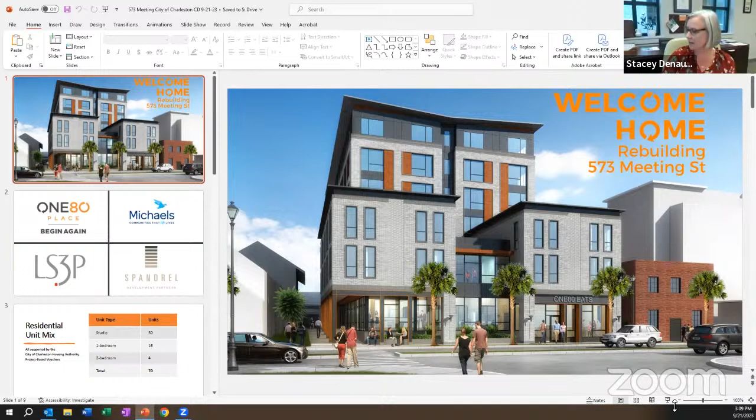Just a quick refresher, the 573 Meeting Street project will be located at the former location of the Crisis Ministry Shelter that many of you remember and have been supportive of over the years. Literally right outside my window here, if I gesture to the back, that's why.

This project has been a long time in the making, and it serves really a very specific purpose around providing affordable housing for individuals moving out of homelessness, so those at extremely low income levels.

The development team that has been working on this project, some of whom you'll hear from today, along with 180 Place as the nonprofit partner, the Michaels Organization, who is a national, widely respected, widely known affordable housing developer and also affordable housing operator. You'll hear from Bruce Morgan. They bring the affordable housing development expertise.

And then after the project is built and leased up, they will be our property management partner for the LIHTC management requirement of the units.

LS3P has been our architect partner from the beginning when we needed to demolish the old facility, and has really been a huge partner for many years now of the organization, as well as many projects in this community that are very well known. And Spandrel Development Partners are our for-profit development partner who bring a level of expertise in the successful development of multifamily housing in many environments.

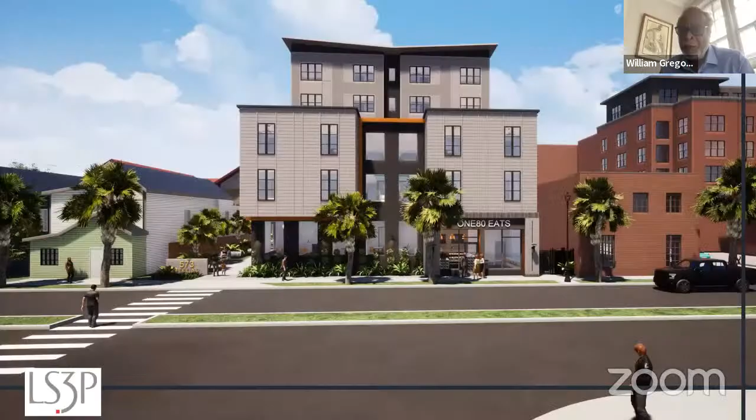And you needed the project-based vouchers to help with the financing, right? Correct, yes. Particularly the renters that we're targeting, that voucher being able to provide the full rental and utility coverage is critical for this target market.

Thank you, Councilman. Just a quick reminder, Upper Meeting Street here, this is a 6-story building starting to blend in, or will blend in more with the fabric as the fabric of Meeting Street is really changing.

Mixed use development. So the first floor has your residential supports, a small gym, leasing office, a business center, some gathering spaces, as well as offices for all of the staff who will provide the supportive services for the individuals in those units, as part of that LIHTC project and the project-based vouchers, being able to have those supportive services on site.

And also right here next to the main 180 Place facility for other services such as mental health care, primary health care, legal services, anything else a resident may need.

A small cafe on the first floor - not going to try to compete with Starbucks right down the street, but this will be an outlet for our social enterprise. Many of you may be aware that 180 Place operates a culinary training program. This will be a retail outlet for the participants in that training program to provide a different level of experience and have a way to introduce their products and that program into our community here.

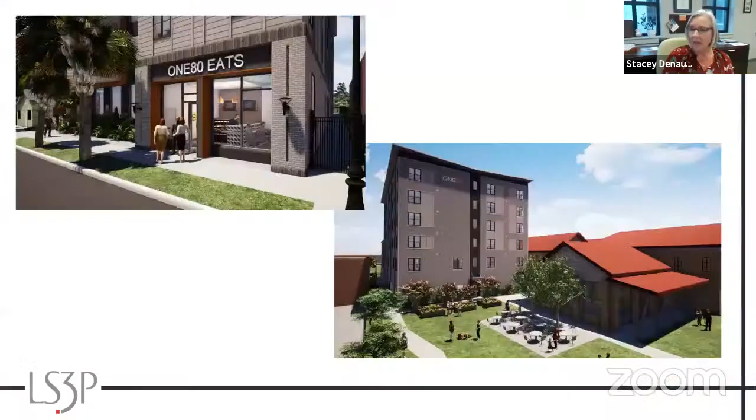Moving into, you can see a little bit of a different view there of 180 Eats. Not sure if that's going to be the name, but that's the placeholder for now.

And then the view of the rear of the building from I-26, that red roof there is the existing 180 Place facility. So really creating a campus, having this pocket park and green space in between the buildings, we think is essential.

While this is not meant to be an extension of the shelter, for those individuals who still wish to obtain meals in our community kitchen or access other services here, that easy access is very walkable. The parking lot isn't shown in this rendering, but there will be a large parking lot to the rear of the property along the C Street end of the road, behind these buildings.

So that's just a super quick overview of the project. A little narrative we use as part of our marketing materials as we've raised money and sought funding, focusing on those low-income renters who are even priced out of the traditional affordable housing market. Those 70 apartments will be filling a very unique need.

Also unique in this project, the second floor will actually be a brand new family shelter with 60 units in apartment suite or hotel suite style units, designed for women or families who are on the road to housing but still need access to more of a shelter. No congregate living. We learned a lot of lessons during COVID and infused even some of those lessons into here. So the shelter floor will really feel more like apartments, just minus a kitchen.

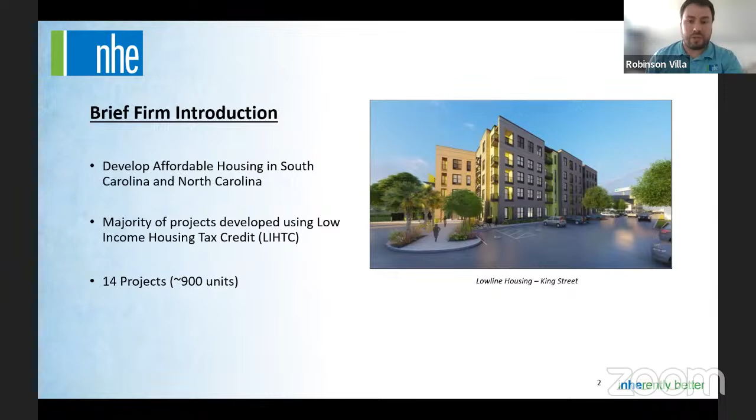So that project is a 55-unit project right off of King Street, 678 King Street. It's behind the Housing Authority project, 676 King Street. A mixture of studio, 1-bedroom, 2-bedroom, and 3-bedroom units.

Our current status, so we have BAR preliminary design approval that took a little bit to get, but we got through there and are excited about doing that. We did that late last year. We also have completed the drawings and kind of have those ready for submission. The thing we need to do is fix our shortfall. So we're currently experiencing about $1 million in funding shortfall. That is being worked through right now as we speak.

We're looking at some alternative means and methods for construction to help save some construction costs and also help us on our insurance costs. And we're also appealing the recent JVRC decision that was given to us for additional state tax credits and additional housing trust funds. We're going to appeal that decision just to see if there's any other money that they could provide to us to help hopefully fill this shortfall. But you know, I think we're working actively on it.

One thing we did just recently get done was we had the Charleston Housing Authority provide 13 project-based vouchers to the project, which are going to help a little bit, a shot in the arm, because we have a large contingent of 30% units here. So it was kind of a meeting of minds with the Charleston Housing Authority that those units could be best served by some project-based vouchers that they have. And they're going to be our neighbors, so it made sense to become a partner with them on this project.

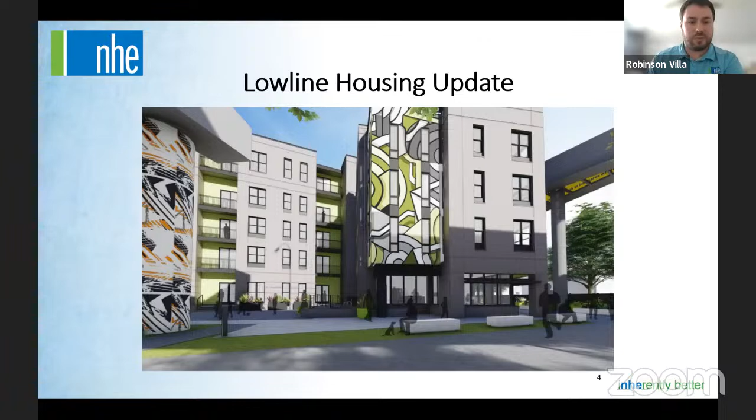I'm just going to kind of cycle through a couple of renderings of our project. I think you'll see when we worked with the BAR, we went through a couple iterations with them on the design of the project. This is looking from the future Lowcountry Lowline, so this would be from the linear park looking back towards King Street. Our project is going to be 4 and 5 stories, and I think it's a handsome looking project, as some of the BAR members were using that term a lot.

The site plan, I think just one thing I just wanted to kind of orient everybody, we're behind 676 King Street, the Charleston Housing Authority project.

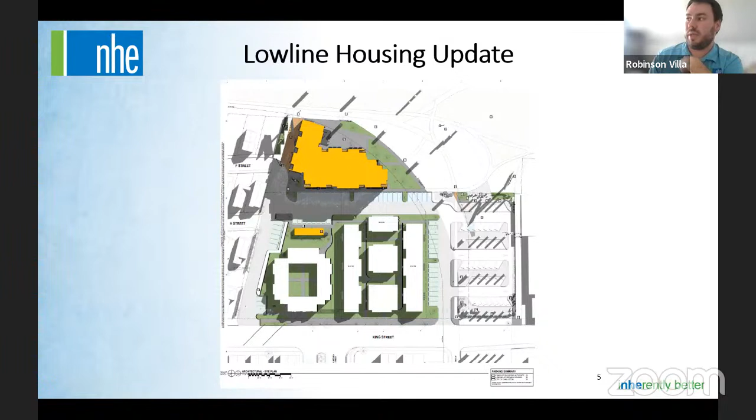The gray area you see to the right is going to be parking for both our project, the Housing Authority project, and the linear park. It's currently just a gravel lot across the street from the Recovery Room bar and restaurant, if you're familiar with that. That's a betterment we're excited about—providing parking for the city and for us, improving that area, and providing a public amenity for people using the park.

As the project is currently designed, it's going to be built as wood frame construction, but with the different fire restrictions and fire standards we need on that building, it might make sense for us to go to a precast concrete product, which would help us on our insurance rates. We're working through that, seeing the savings from that and from insurance. There may be a potential resubmittal to the BAR just to show them the new material, but the design will not change at all—it's the same design, just a different material.

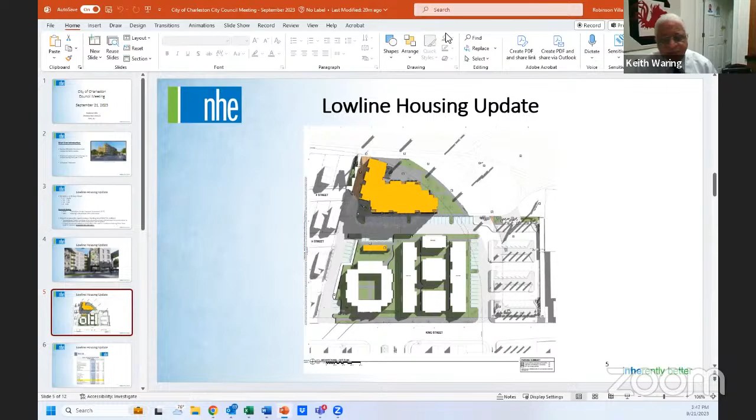Yeah, especially the extension of the water and sewer, that's the actual cost. I can do some homework and get that for you. That'll work, you can push that back out by email. Yes, sir, okay.

Any other questions? I don't see any hands. I don't want to miss anyone. All right, thank you very much, Robinson. Councilman Appel? I was just telling Robinson, thank you, we'll see him next time. Please do another project with us.

Yeah, or two. I'm looking forward to it because it's right up the street from me where I live, the Lowline. I was looking for that, looking at it every day. So we can try to get that underway because we need this housing very bad. It's on King Street, so that'll be a wonderful project right there with the Lowline in that particular area. I'm looking forward to seeing it before I leave.

All right, we are moving right along. So we'll go down to item number 3, the status of Grove at Johns Island, formerly called the Fenwick site, and request for amendment to the development strategy, Resource Housing Group.

Sam Coats. Thanks, Mayor and Council, and Gianna, for giving me the opportunity to speak with you all today and give an update on the project, the Grove on Johns Island. This site is city-owned land. We were successful in obtaining the opportunity to develop this parcel through an RFP from the city a year or so ago. We were able to apply for tax credits in the 2022 9% cycle and were successful, so we've obtained funding for the rental component of this project.

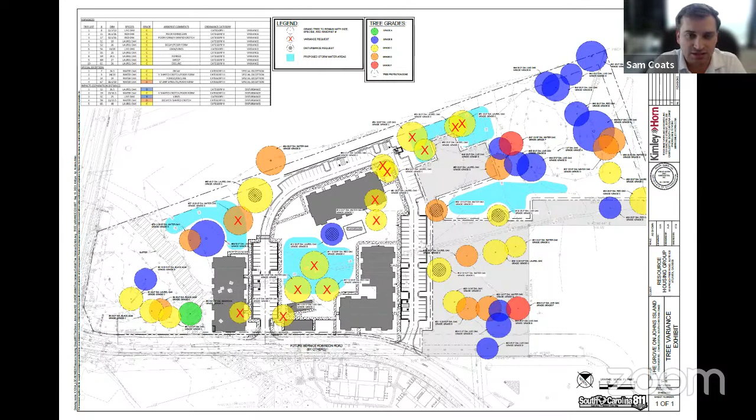This next plan here with the red X's on the trees are the trees that we have requested from BZA to remove. Again, the buildings are taking up a good percentage of these trees. The remainder of the trees we're requesting to remove are due to stormwater. As all of y'all I'm sure are aware, and I'm learning more and more, the stormwater requirements in Charleston are extensive, and the sheer land volume it takes to handle the stormwater of a project of this nature is great. You can see the ponds here.

There's a good amount of water above ground throughout the site that we're needing to incorporate into the project.

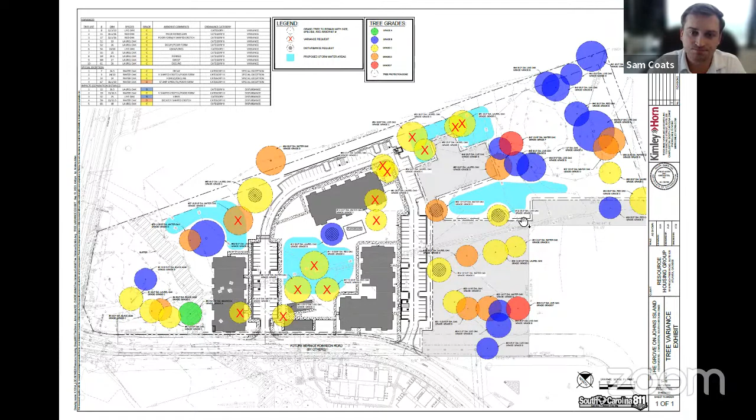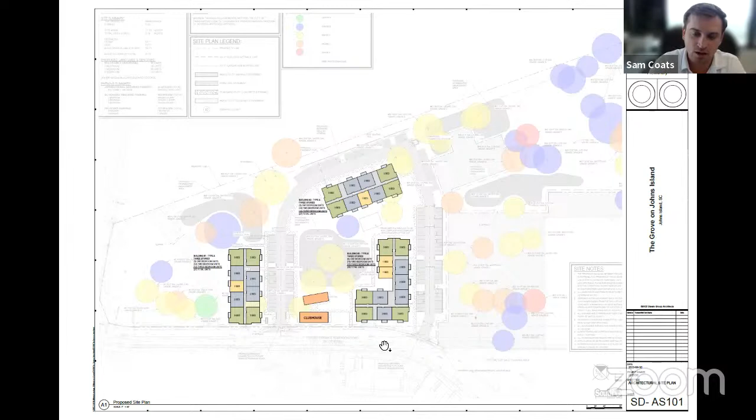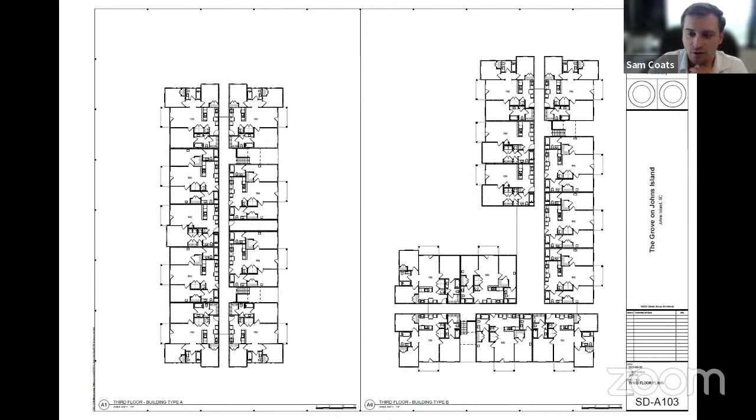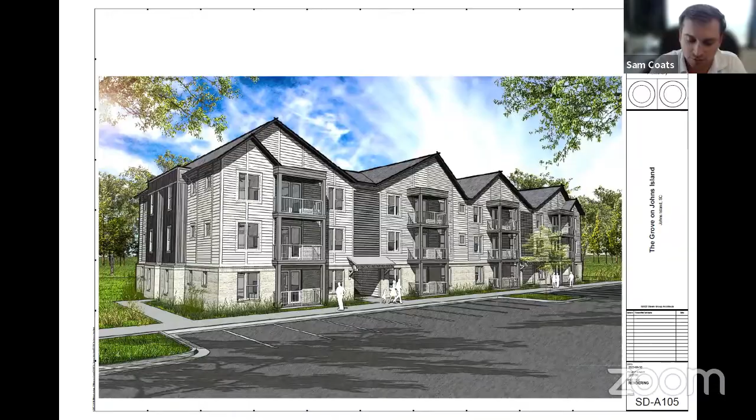And here is a color rendering of the project. I have a note from the architect when he sent this over to me that I'd like to share with y'all. The design is referencing the name of the project. The roof line uses varied pitches to mimic the canopy of grove trees. There are vertical trim boards that separate alternating 6 and 8 inch lap siding to create some texture on the facade. This picks up on the texture you see on the back of leaves.

We are proposing screening the breezeway openings with horizontal composite slats. At night, you would have a glow of the lights in the breezeways through these slats, like a lantern. So we're really trying to incorporate the feel of Johns Island and the neighboring properties and the aesthetic of this area into this project, to create something that's not only fitting to the community but very, very appealing.

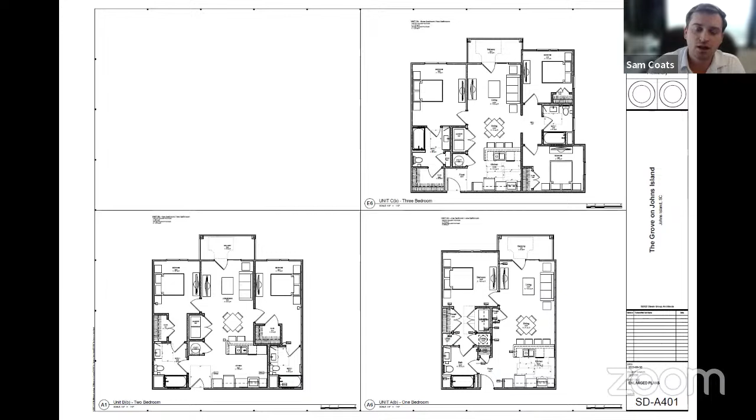I'd like to take one second to tell you all about the sources and uses for this project. This project is a $32 million project. The city has contributed $1 million in infrastructure, which helps with costs that are very extensive to the site, like stormwater, utilities, and preparing the grade of the site. That $1 million investment, in addition to the investment the city made in the land, is leveraged into a $32 million project using state low-income housing tax credits and debt on the property.

The low-income housing tax credits make up 76% of the project cost at $24.5 million. The debt makes up 20% of the project at $6.4 million. And the city's contribution of $1 million makes up 4% of the total development cost. So it is stretching the city dollar very far for the Grove on Johns Island, which we are proud of.

We are fortunate to have this project funded in 2022, which was after a lot of the allocations that had these large gaps. At the moment, we do not anticipate a funding gap, which will really allow us to move as fast as we can to the finish line to have these units constructed and bring these affordable units to the city of Charleston.

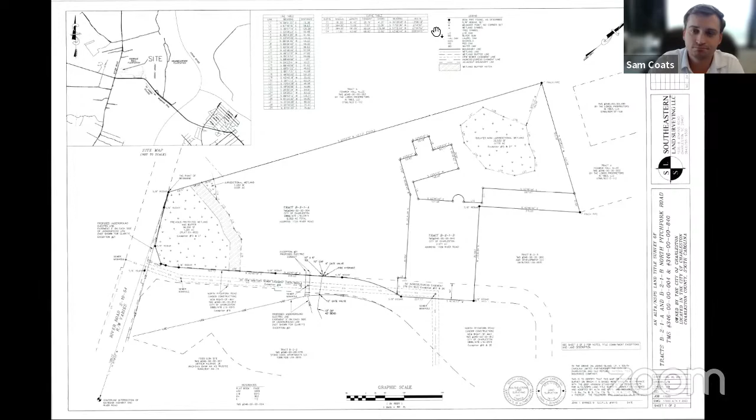All right, thank you very much. Do we have any questions? I'm looking at the hands. No questions? Councilman Appel, you don't have a question?

Leave him alone. I'm going to do every other agenda item. Okay, I'm going to take it easy on you.

All right, the mayor had his hand up, Councilmember Mitchell. Oh, I didn't see the mayor. Okay, Mr. Mayor. Mr. Chairman, so yeah, I normally think of something to say.

I want to thank Sam and Robinson and 180 Place. Stacy, thank y'all for partnering with us on all of these. It occurred to me just thinking of these numbers all together that, well, this is probably not counting the $3 million from the Climb Fund. Direct city funding of about $6 million total has leveraged about $100 million of construction of affordable housing, which I think is remarkable.

The downside has been timing, maybe not so much on yours, Sam, because you came along later than the other two, and COVID was a factor. A big factor was the deal with the state tax credits getting turned over upside down, making everybody re-scramble for their equity package to make all of this happen. So that was most unfortunate. We all know that, but thank y'all for hanging in there with us and helping make all this happen. It's really important for the future of our city, and we appreciate the partnerships. Thank you.

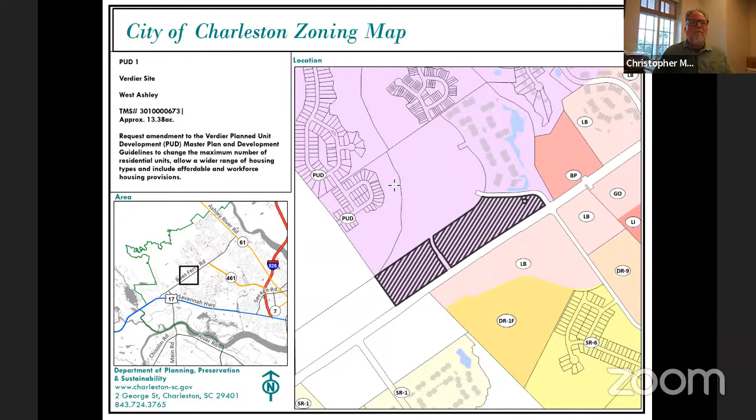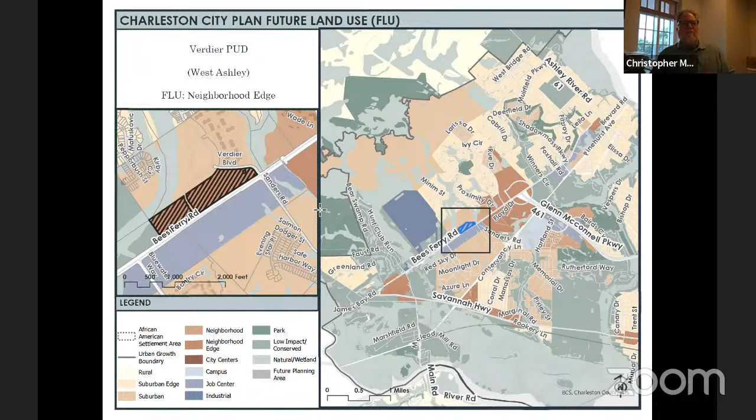In our comprehensive plan, this shows in what we call neighborhood edge. It is near some land that is low, but it itself is not as low, and therefore it has recommendations for neighborhood edge, which allows up to 20 units an acre. That has been taken into account with the site planning being done for this project.

This was our PUD amendment that was at Planning Commission last night, but here's the actual PUD amendment. I won't go through all the language, but there are a few things that get changed. This chart shows the change. Originally, this portion of the PUD was going to have about 40 dwelling units and a good bit of commercial space. With these amendments, it would have 246 affordable housing units.

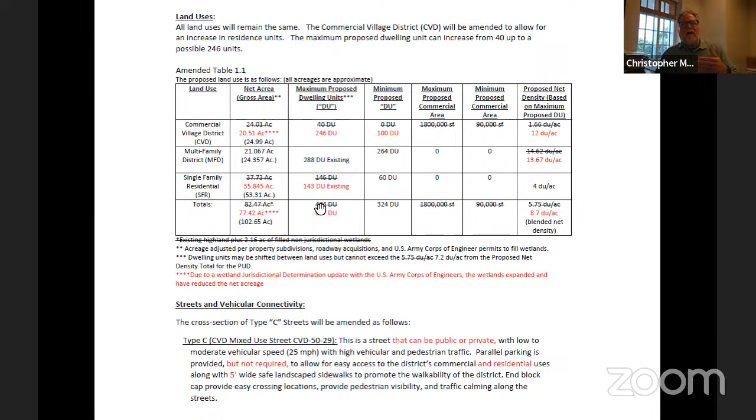There already is single family development occurring in the development, and overall the dwelling units per acre are very much in line with what our comprehensive plan calls for.

A couple other things to point out. There is a change in heights. It would go from allowing 4 stories to allowing 5 stories. Again, this is to facilitate the affordability on the site, and I'll show you an early concept site plan that gives a sense of how it would be laid out.

Again, this is the overall PUD, and the development of the affordable housing will occur in these areas. If you can see my cursor going across, there will be a portion retained for commercial development. This would be for a convenience store that would potentially include the things you normally see with a convenience store, such as gas pumps and a small car wash. It would not be a standalone car wash.

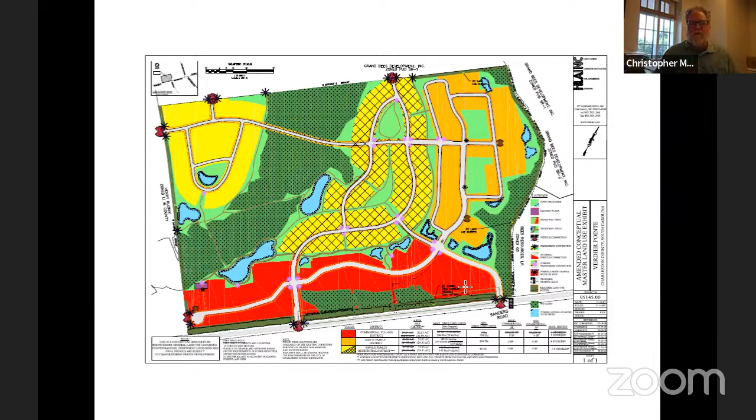That was discussed at Planning Commission last night, and there's language that would be amended in the PUD that would allow for a convenience store with a small car wash, like you see with a lot of the other convenience stores around town. These are just the roads that would be in the development. Some of these are already in place, and road sections.

Here again is an aerial image of the site. Already some of the road right-of-way has been cleared. That was done a while back, and there's new single-family development going on to the rear underway now.

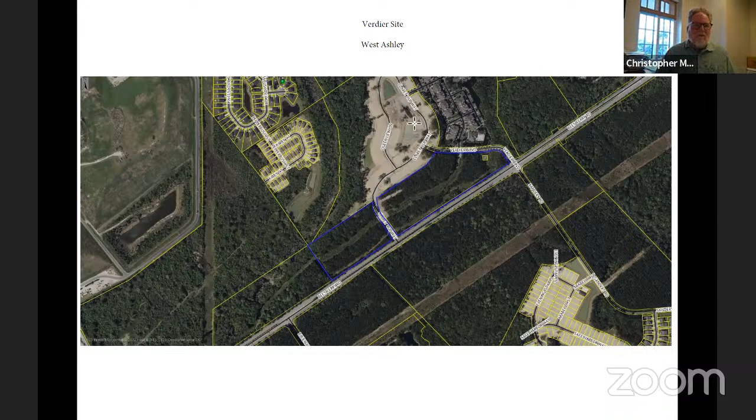And then this was one of the changes to the PUD: that gas stations may have as an accessory use a car wash, if the footprint of the car wash building does not exceed 1,500 square feet. That was endorsed by Planning Commission last night, and that is very important to the seller of the property who is retaining the commercial corner.

Here we have the overall site, and just a few things to point out in the surrounding area. The C.E. Williams Middle School just down Sanders Road is 1.25 miles away. The new Bees Ferry Library, 1.25 miles away. West Ashley High School, 2 miles. The Walmart is a mile away, and there are CARTA routes that come to the Walmart.

There already is a bike and pedestrian trail along Bees Ferry that could be utilized to get to those locations. And of course the Walmart is a grocery, and there's a new grocery, Harris Teeter, up here, about 3/4 of a mile away. So pretty well located. Parks in Grand Oaks are there as well, and again, higher and drier than a lot of the other things on Bees Ferry, and definitely recommended for development in our comprehensive plan.

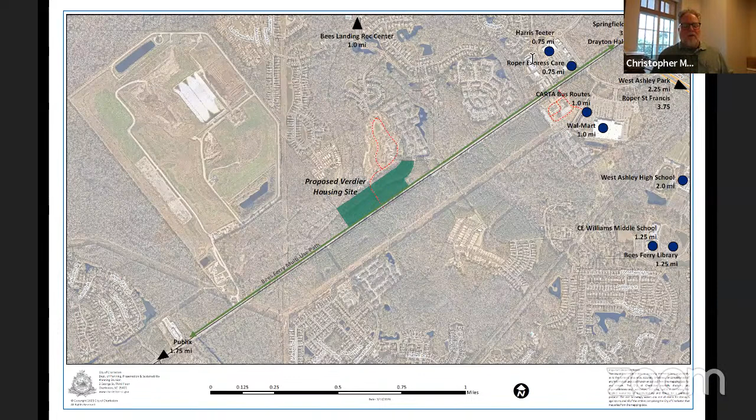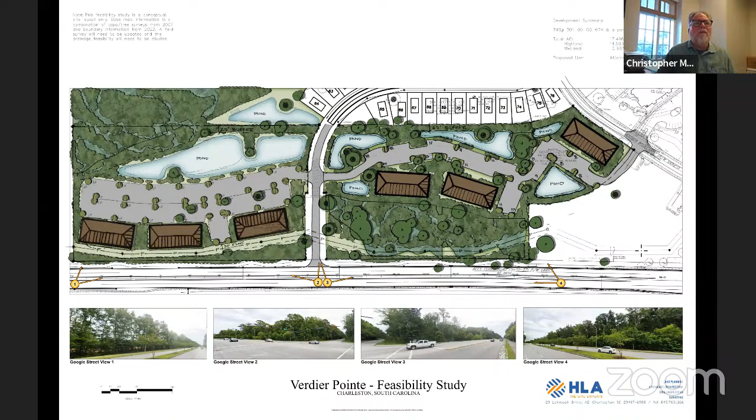This is an early site concept. Bees Ferry is at the bottom here. These would be buildings that would utilize some of that height. There would be traffic traversing through the development here, and then this would be more of a direct route for the single family and other apartments that are in the development. And of course, there is a traffic signal just to the right of this page here, so easily accessing out onto Bees Ferry.

So that is the information that we have to share with you all. This is coming to City Council in October for approvals for the PUD amendments. The public hearing would be on October 24th, and you all would be asked for first reading approval on October 10th. And I'm happy to answer any questions you might have.

Okay, could we move that screen, Chris? Yes, sir, I will get that off. Let's see. Thank you, let's see, there we go. Oh, I don't know if that got rid of it. Hold on one second. Oh, here we go. I think I saw, sorry, trying to get the screen share off here. All right.

Mr. Chairman, Councilmember Sakran had his hand up, and Mayor Tecklenburg. Yeah, I was trying to get him to move the screen first, but Councilman Sakran, you can go ahead. Since I can see that, you know.

Thank you, Chairman. Christopher, while you're trying to get that, could you just elaborate a bit more on the commercial portion of that parcel that you mentioned something about a gas station? Yes, at the corner of Sanders and Bees Ferry would be a gas station, convenience store type of facility. Like a Parker's type thing, gas pumps, convenience store, and then potentially a small car wash too.

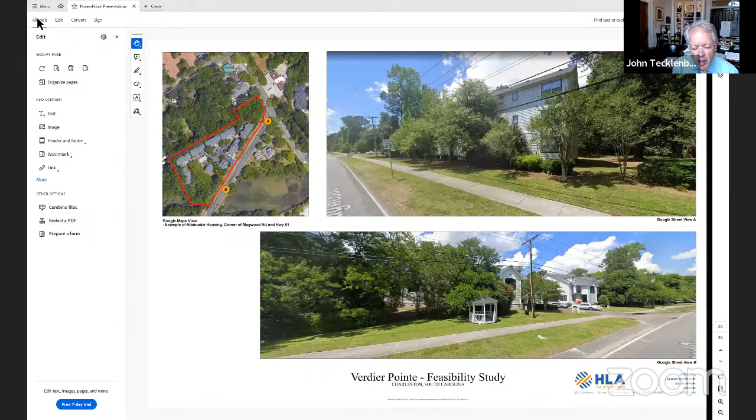Okay, I see, Mr. Mayor, you have your hand up. So related to that same question, that part of the property, however, is not being sold to the city, correct? The seller's retaining that, but we're making a PUD modification that impacts the business side of it. That is correct, Mayor, yes. Previously, you couldn't have had a convenience store there in the PUD. It would have been commercial uses like offices, retail, restaurants, but it couldn't have been a convenience store. And they had asked to have an allowance for a convenience store there.

I see, okay, do we have any other questions? If not, I need a motion for the amendment and update so we can send it on to council. So move. Second. Okay, it was moved and seconded. All in favor, by saying aye. Aye. Opposed? I'm voting aye, but just, did you mention that the planning commission approved it last night? Yes, sir, unanimous approval last night. Recommendation for approval at planning commission.

Okay, thank you. All vote by saying aye. Aye. Opposed? Okay, the mayor's the only one opposing it, right? Right now he's not voting on that. Okay, then move on, he voted on it. Oh, he voted on it? Yes, sir, yeah he did. Oh, okay, I thought he was saying he was gonna. No, I was, even beginning I said I was going to vote in favor, but I was just curious how the planning commission vote was. Oh, okay, okay, yes, sir. So it's approved, it's gone, approved with city council.